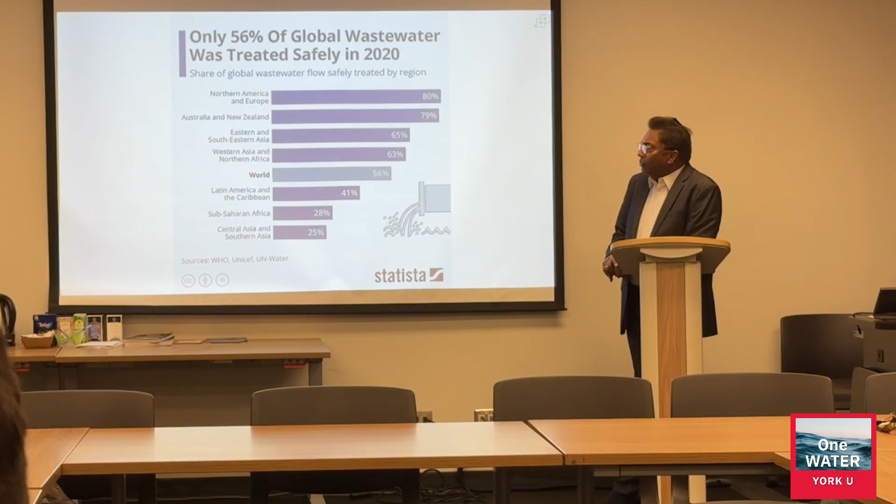So this is an updated figure from 2020. It shows the amount of wastewater which is discharged to the environment after a reasonable treatment. A reasonable treatment does not mean that it removes phosphates down to 0.5 or 0.3 milligrams per liter, nitrates down to 6 or 8 milligrams per liter, or COD below 100. It's far from that, but it is a fairly acceptable level.

And you can see that 44% of wastewater in the world is discharged to our water sources, water courses. A part, of course, goes to the sea, the other part goes to our freshwater resources. So it means that the little amount we have is also becoming inaccessible because of this unsustainable use of our water.

Then in the last few years we started to talk about the reuse of water. I understand that Professor Bra's team is also working on water resource reuse, because until maybe two or three decades ago, wastewater treatment was considered a cost only, a headache. Nobody wanted to work on this because it was just a cost, right? But things are now changing.

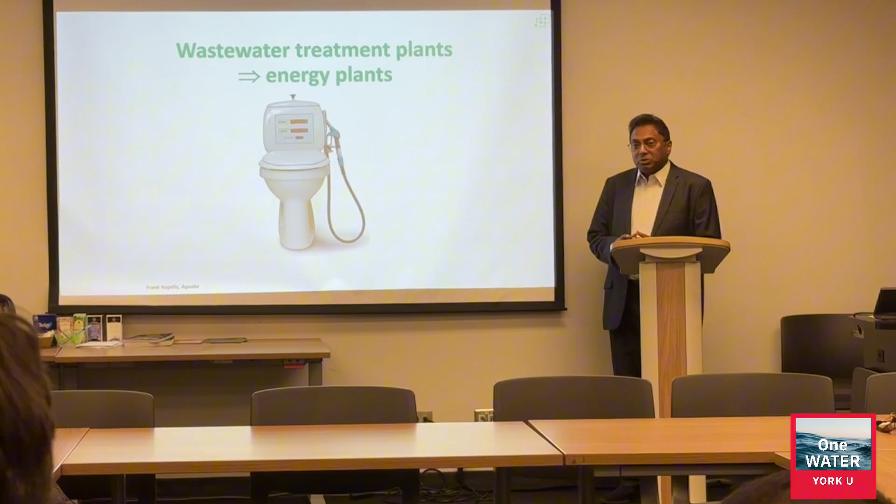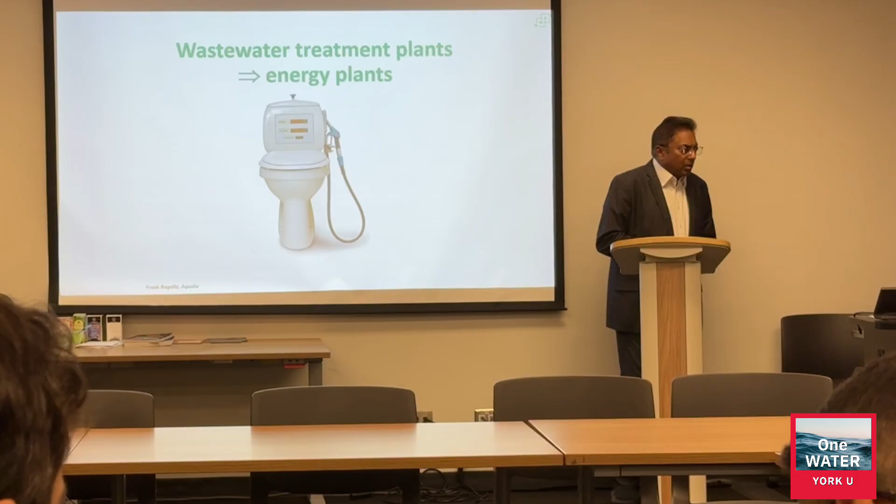One of my colleagues, Frank Rogalla from Aqualia, showed this figure maybe 20-25 years ago. He said, we will not talk about wastewater treatment plants in the future, we'll talk about energy factories. And in fact, that's what's happening. Although there are few, there are a number of wastewater treatment plants in the world which produce an excess of energy. They are self-sufficient with energy, and not only that, they also supply energy to the national grid. I think we are going to see more and more of this in the coming times.

If you take Germany, Germany has prohibited all sludge treatment methods other than incineration, because of space issues and other disposal issues. But it says that before incineration, you have to recover phosphates. And I think the most common way to manage wastewater sludge is now to generate biogas, but it's still not happening everywhere.

In Norway, we have been using our sludge on agricultural lands because the heavy metal content is extremely low in Norwegian wastewater, because we have been disciplined not to throw everything into our wastewater systems. Right? So Norway is one of the few countries which legally allows wastewater sludge to be used on agricultural lands. Up to 8% of our sludge was used on agricultural lands, but it's now reducing because we are also starting to generate bioenergy or biogas from wastewater.

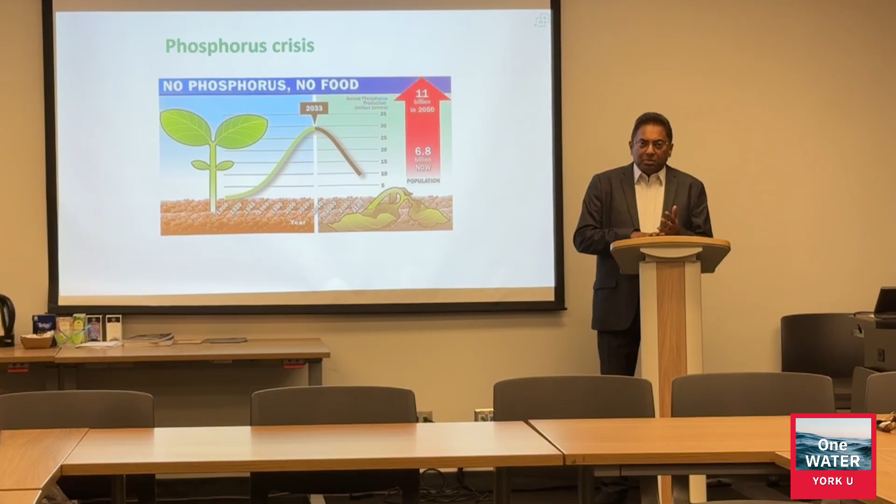But there are old concepts with new applications, like generating struvite from wastewater and wastewater sludge. Struvite is ammonium magnesium phosphate, right? These white crystal-like things. In wastewater we have enough ammonium and enough phosphates, but we don't have magnesium or potassium, so sometimes we add that, and then we can get the struvite out.

So to continue with the issues pressing our sustainability related to water, there are these factors I would like to mention: urbanization, lack of land, virtual water, and climate change. You might wonder what that has to do with water.

And these are the continents where the water challenges in urban centers are already critical, which means that they are going to face a huge problem in the time to come.

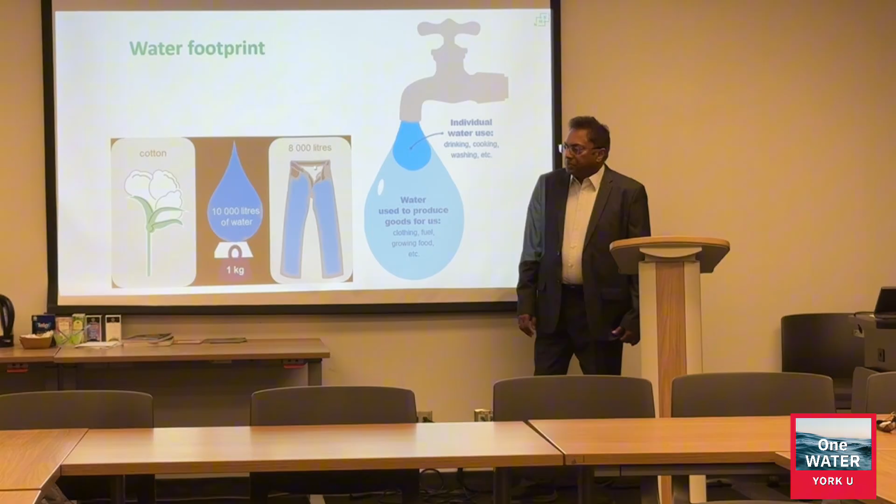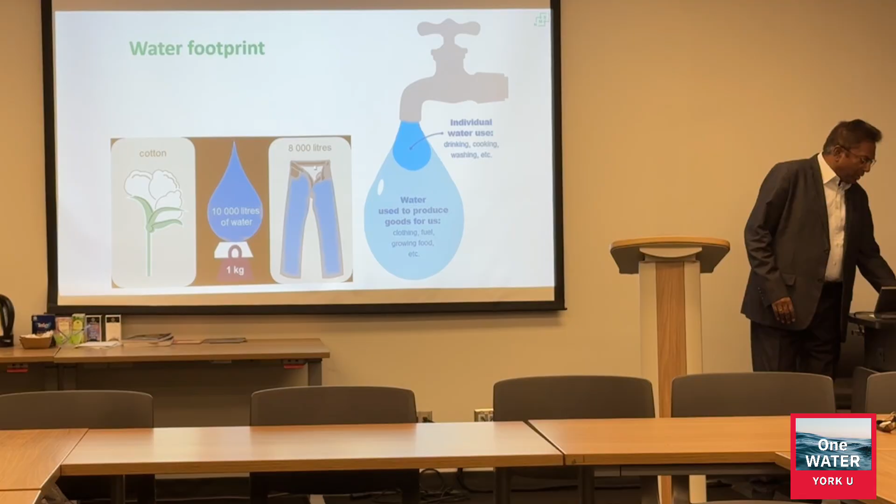What he says is that to produce one pair of jeans, you need 8,000 liters of water. Well, you can also live with that because you don't buy jeans every month, right? But if you look at this table, this is where you're going to get the shock of your life if you haven't seen this, right?

To produce 1 kilo of beef, you use 15 tons of water, starting from the grass and also the processing and everything, right? So that's why I'm saying that we have to change our traditions. Some of you are way ahead of us, like Professor Brad. No meat. But we have to change this tradition of using beef and pork.

Some of us are used to having steaks and beef, and that's why some countries have already found ways to produce artificial beef. I've seen Israelis have produced some steak, and Netanyahu, or one of the presidents before, when he visited this lab, tasted it and couldn't find any difference. That's completely vegetable based. It's much better than the veggie burgers we see here today. So this is an example.

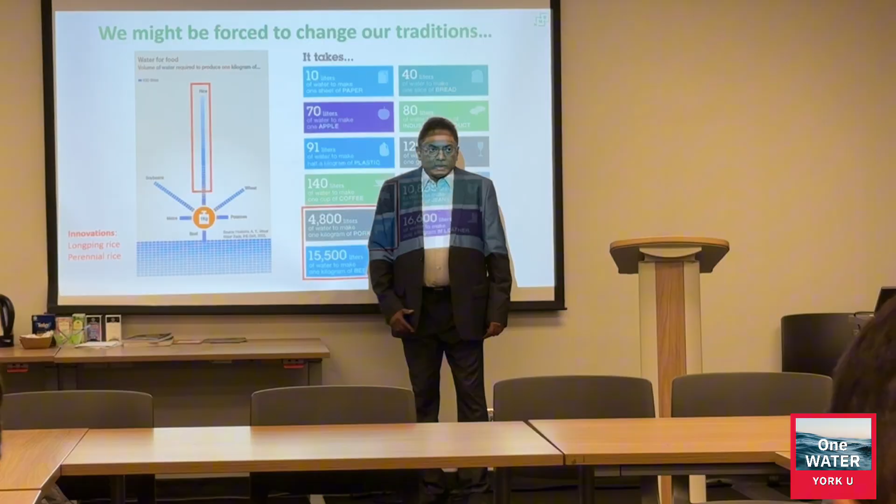But there are innovations, like this Chinese professor who found this Longping rice. Usually per year, 2 harvests are common, right? 1 to 2 and maybe 3. But this guy has come up with a solution where you can have up to 6 or 7 harvests per year. So it changes the whole thing.

And then there's another group of researchers working on what's called perennial rice, which means that after harvesting, you are not taking out the whole rice plants. You can re-harvest 2 or 3 times. So there are ways to do it, and we are working on that.

So this is a figure that we have to think about; even an apple takes 70 liters, 1 glass of wine 120, coffee is 140. So these are crazy numbers. Of course we can say that beef is coming from Brazil, Argentina, so it's their problem. Or 80% of your clothes were coming from China before Trump's time, but it might go down now because of the taxes, and so it's a Chinese problem, you can say.

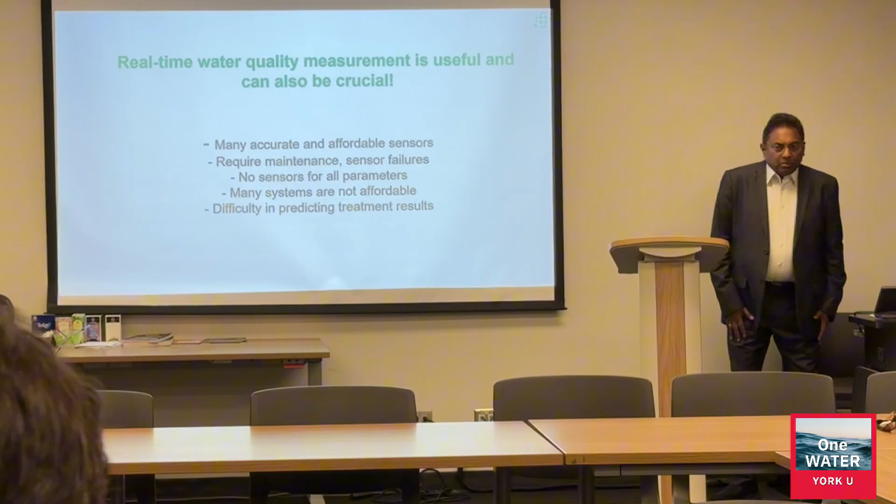So if you're going to measure phosphates, you take a sample and you add chemical 1, mix it, chemical 2, mix it, chemical 3, mix it, and let it stay for some time. For COD you will also have to heat it, and after that you measure the absorbance, right? So everything's automated. So these instruments are quite handy for laboratories which measure these parameters in bulk. They are using this because it saves time, especially in this part of the world where the labor cost is very high.

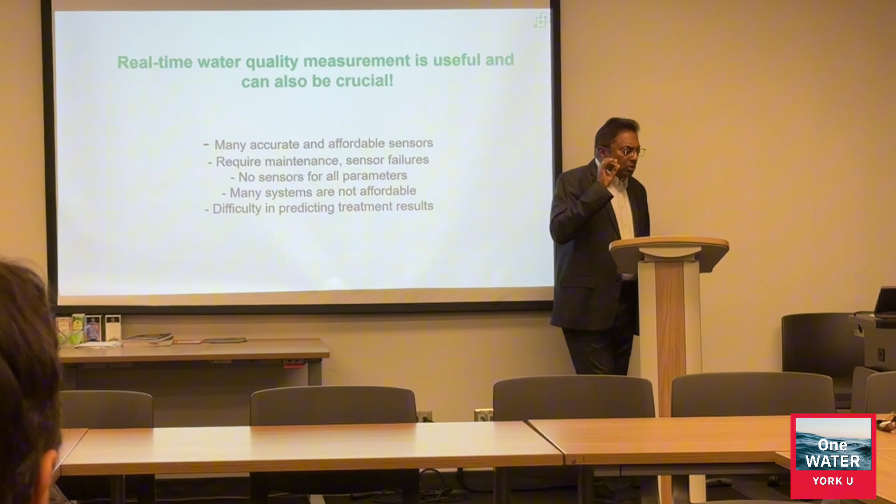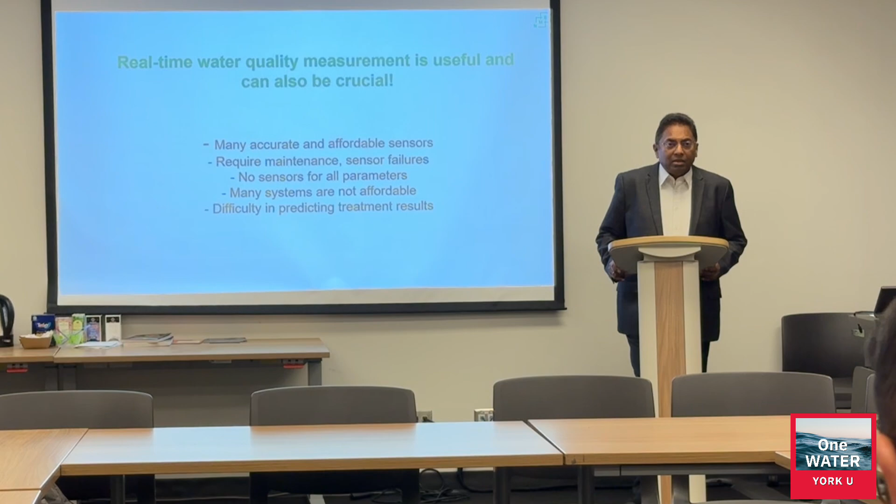And then there is a need for real-time measurement. We cannot wait 1 hour, 2 hours, 1 day, or several days until we get the results from a laboratory to optimize our treatment plants. Because if you think about wastewater, our wastewater quality is changing. We say that every 15 minutes our wastewater quality changes, but at least every hour it changes, right? So if you're going to get your results after a day, then the train is gone, so you cannot do anything with that. That's why we need to know the water quality, the inlet and especially the outlet, immediately, so that we can take corrective actions. So to do that, we have to measure the water quality in real time.

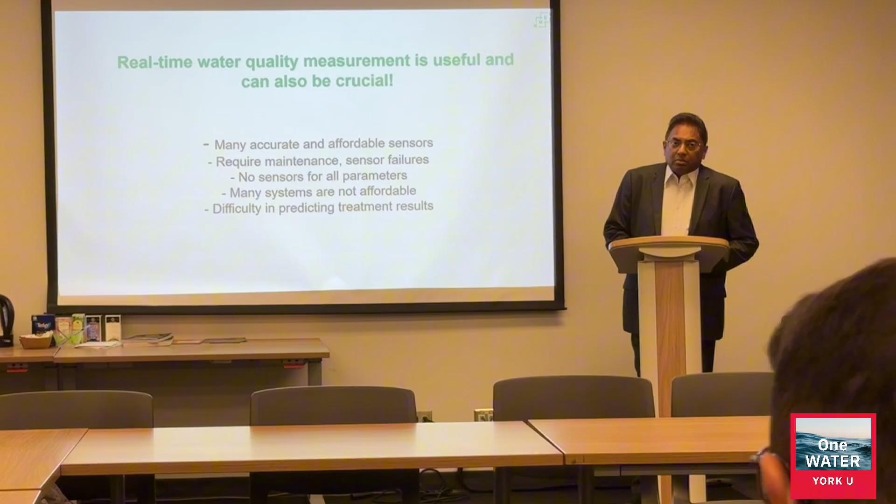To do that, there are a number of real-time sensors. There are many accurate and affordable sensors, but they require maintenance. So they will not work 24/7, 365 days. You have to maintain them. And even if you maintain them, they might not work all the time. So how are you going to deal with that if you're going to use them not only for measurements but also in your process control, right?

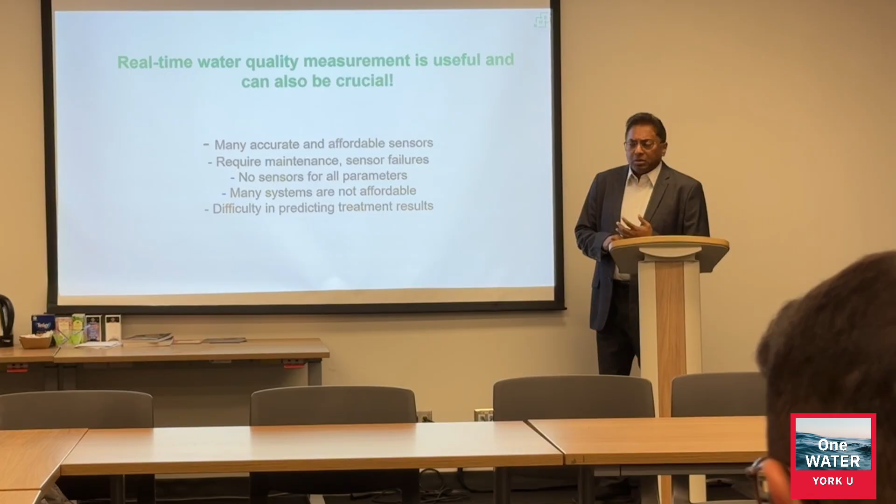And there are no sensors for all parameters. For example, for phosphates there are no real-time physical sensors. There are analyzers which give you the results after 10 or 15 minutes, but they are quite expensive. And if you take the emerging contaminants, there are no such sensors or real-time systems. The biggest problem is many systems are not affordable. They are quite expensive, and it is difficult to predict the treatment results. This is the other thing. We cannot say what's going to happen if we add this chemical or if we have the biological process. What would be the final result? We can of course say the average results of what's going to happen.

So this is a schematic figure for a drinking water treatment plant, conventional water treatment and a wastewater treatment. Right? Drinking water, we have a strainer, and then we have a coagulation stage, two-media filter, granular activated carbon to remove odor and taste and whatever, and then we have the disinfection part going on, adjusting the pH.

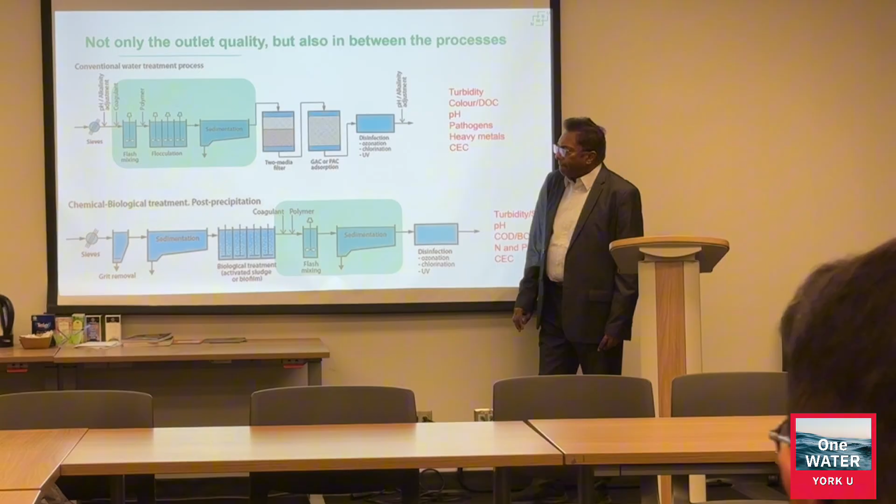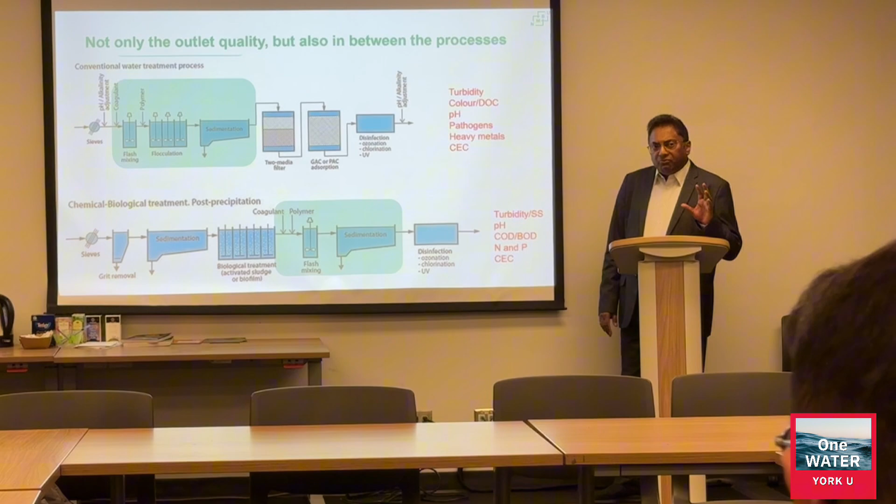In wastewater, there are different configurations, so it shows that we have biological pre-treatment or biological treatment to remove organics, and then we have the coagulation to remove the remaining particles and phosphates. Going out here. Before, it was enough to measure the water quality at the outlet and say, yeah, we are doing our job, it's good enough. But the times have now changed.

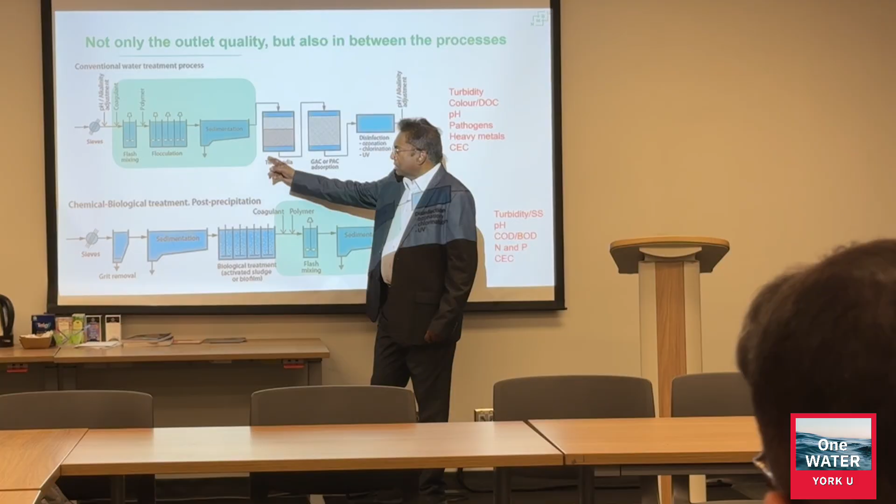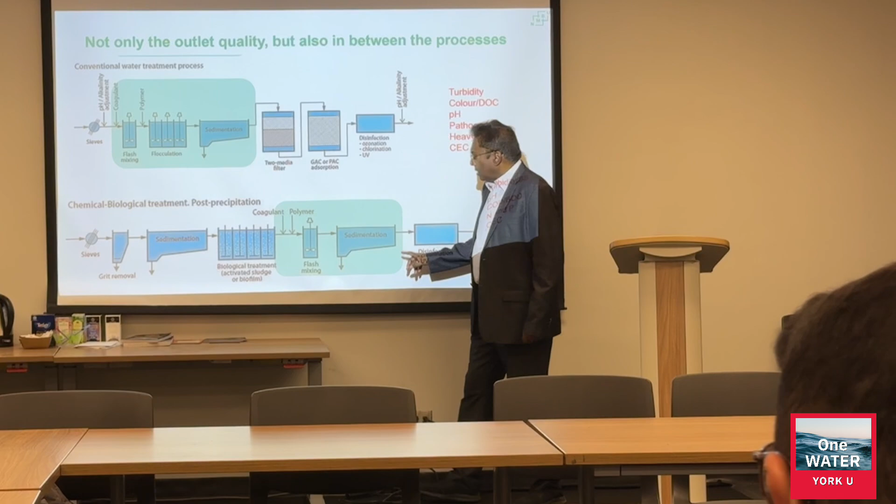We need to measure these parameters also at the inlet and in between the processes. So if we want to optimize this part independently of this part, we need to know the incoming water quality here, outlet here, so that we can optimize this process.

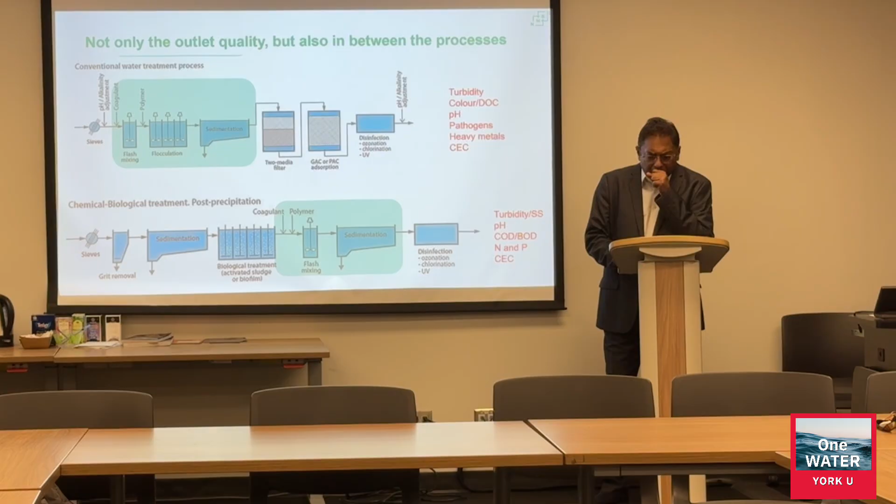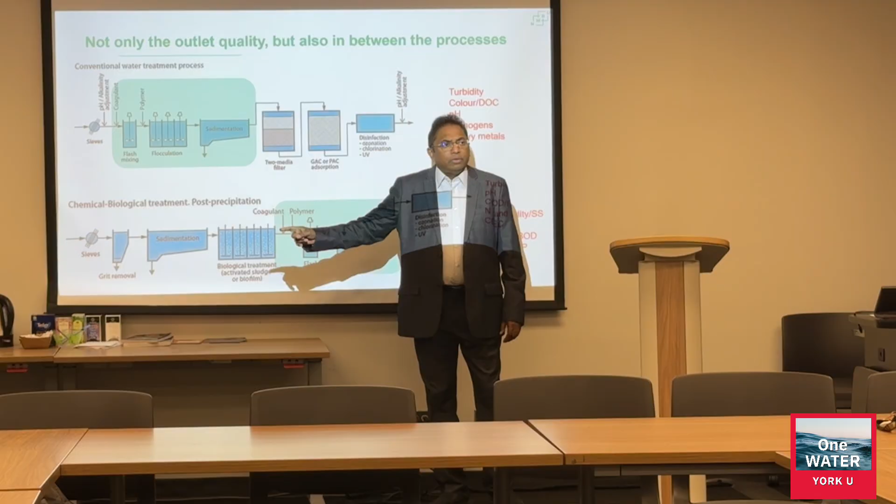When we talk about the removal of emerging contaminants, today we measure the emerging contaminants concentration at the inlet and outlet, and then we start proposing, yeah, let's add this unit process or this unit process. But I try to convince that, okay, we may need to do this, but if we run our processes more optimally, we can remove much more than what we are removing today. But to do that, you need to know the water quality between the systems.

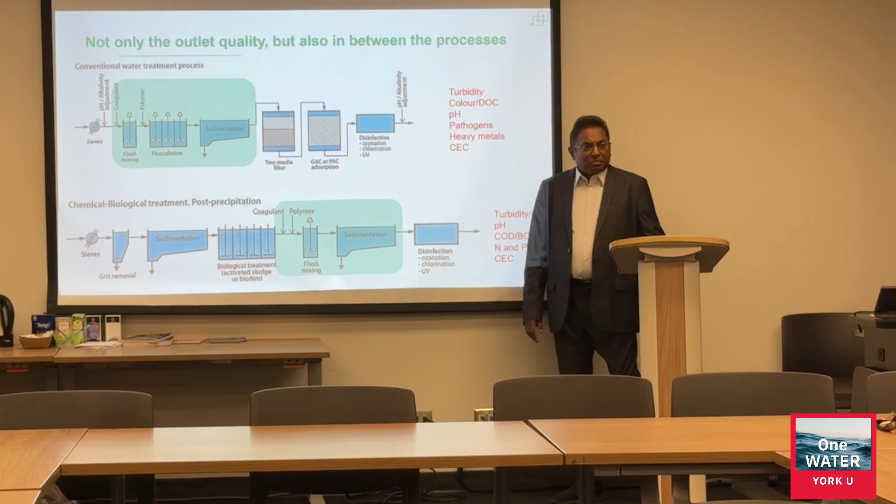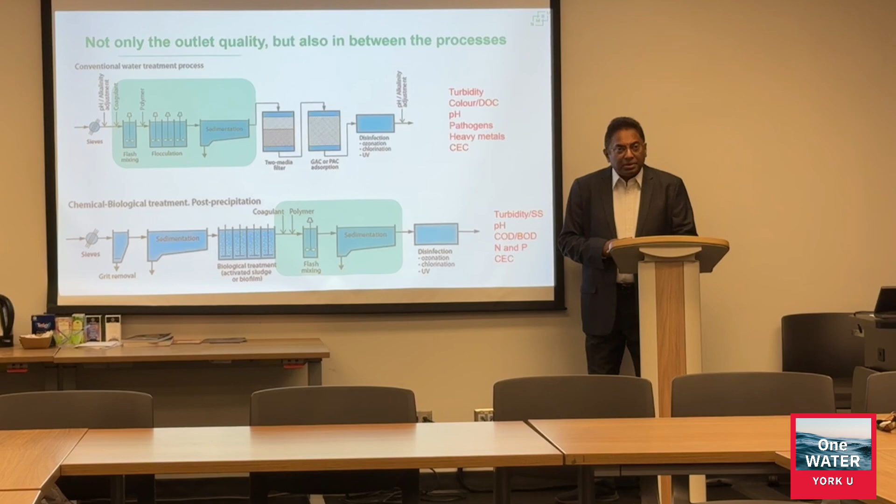So if you can measure the concentrations here and there, then you can see how we can optimize our processes or super optimize our processes, so the removal of this stuff will be much higher, and the additional process that we have to add here or here or here will be less in volume and maybe also less in costs.

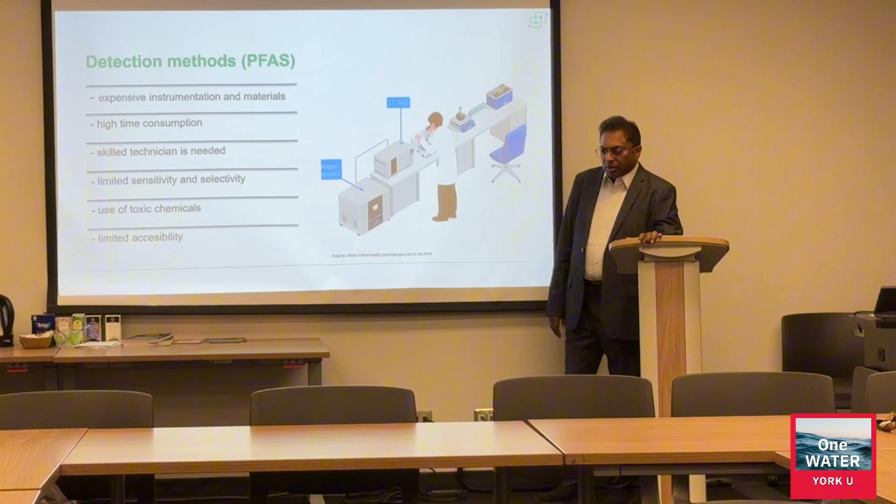So detection methods, if you take the high-end methods like for PFAS or pharmaceuticals, they're expensive, high time consumption, skilled technicians are needed, limited sensitivity and selectivity, especially if you're working with emerging contaminants, and you know that we are talking about nanograms, use of toxic chemicals sometimes, and limited accessibility. So we have to find a way to go away from them. So there are examples.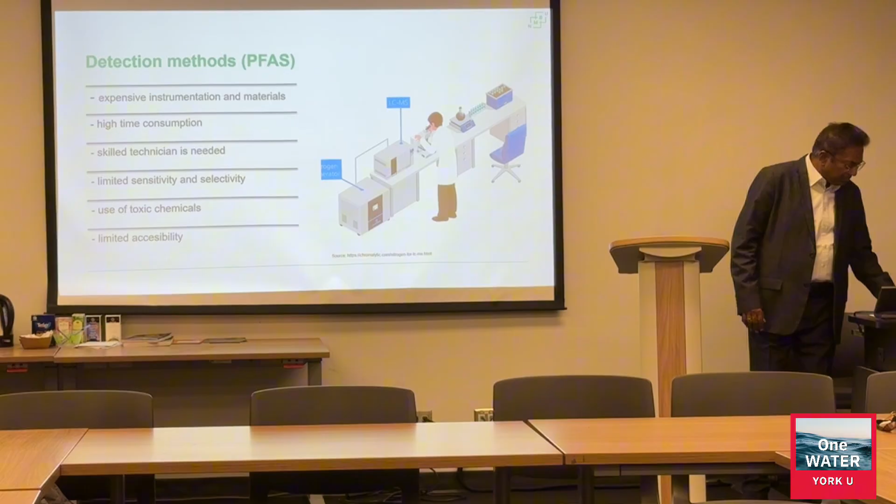Has anyone come across this sensor, this company called s::can? In your laboratory, the spectrophotometers, I guess all of them are scanning spectrophotometers, right? So you put a sample and it gives you the spectrum from 220 until 800, right?

When Professor Brad and I were at the university, we had to measure the absorbance at 450 and got the result. And sometimes that spectrophotometer measured only at that wavelength. Sometimes we could turn it and measure maybe 3 or 4. But now we're in a different world, where we get the whole thing. So this company, this is an Austrian company, they are probably the first in the world who produced the sonde which produces the scanning spectra.

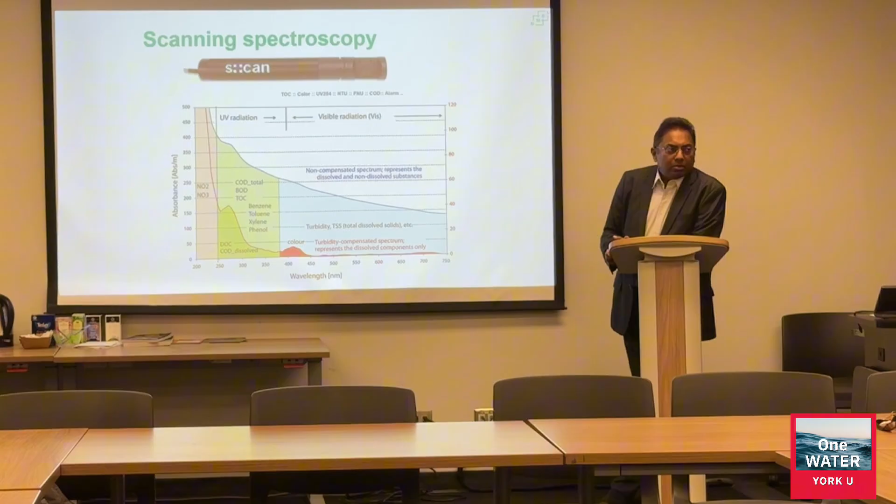Right. So here's the results. So they start from around low 200 and go up to 800. So in a sample, they will get this spectral absorption curve, right? And this absorption curve is influenced by the particles in water. Since you can measure particles like turbidity with the same instrument, you can subtract that, and then you can have the net absorption curve, which is shown in red here.

And then you can have algorithms to convert the absorbance at, for example, here 420 into the color in milligrams per liter, right? The same way like COD, BOD somewhere here, nitrates and nitrites are here, and some other parameters. So you do the scanning or analysis at once within seconds, and on the screen you will see all the parameters

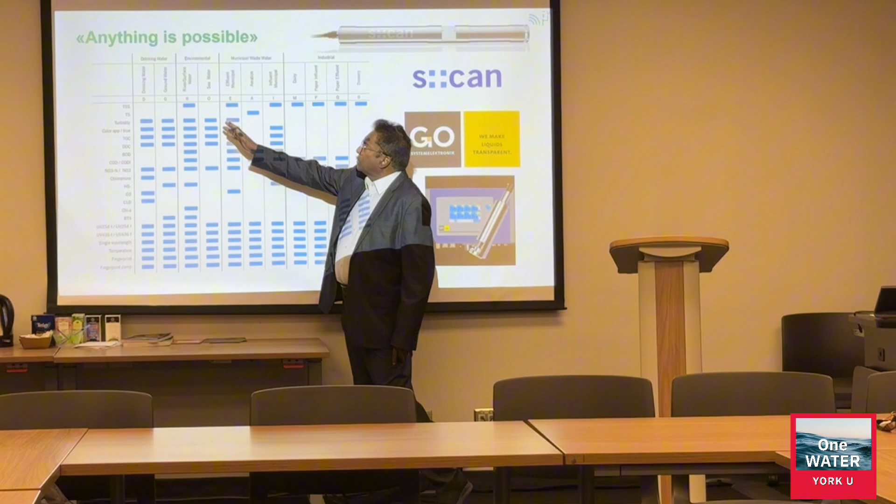measured. So soon after this Austrian company s::can, there was a German company called go Systemelektronik that started doing the same thing. What they say is that they can measure anything, but not phosphates. Apart from phosphates, they put everything else. So those are drinking water, groundwater, river water, sea water, and wastewater, paper mill, industry, everything. And the blue sign means that this sensor can give you all the measurements.

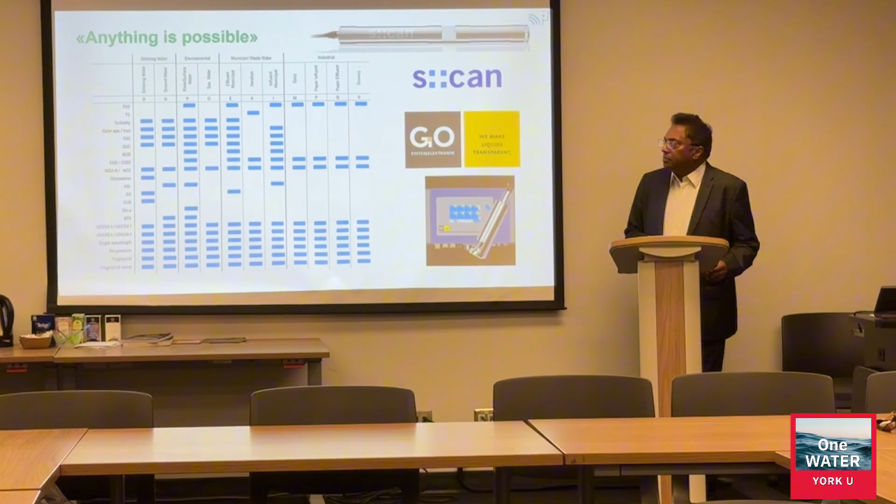So there are some versions of this instrument. So it's like a wonderful instrument. It is, but there are divided opinions or experience from the users. Some are very happy. Some say that it's not as what they say. Some countries have bought these instruments. They put, I think, 100 or 1,000 units along Ganges.

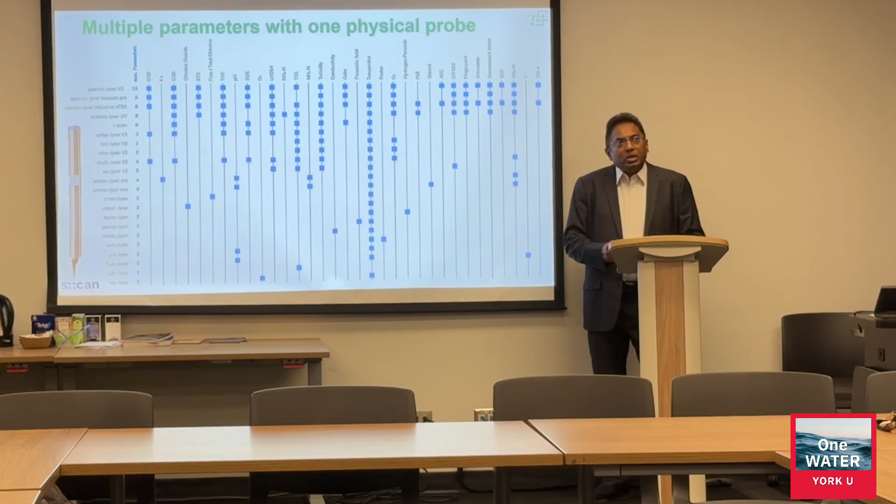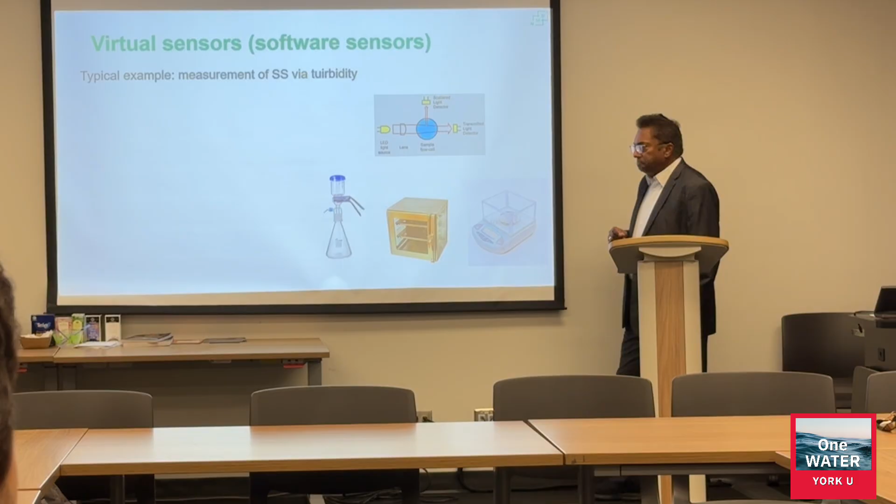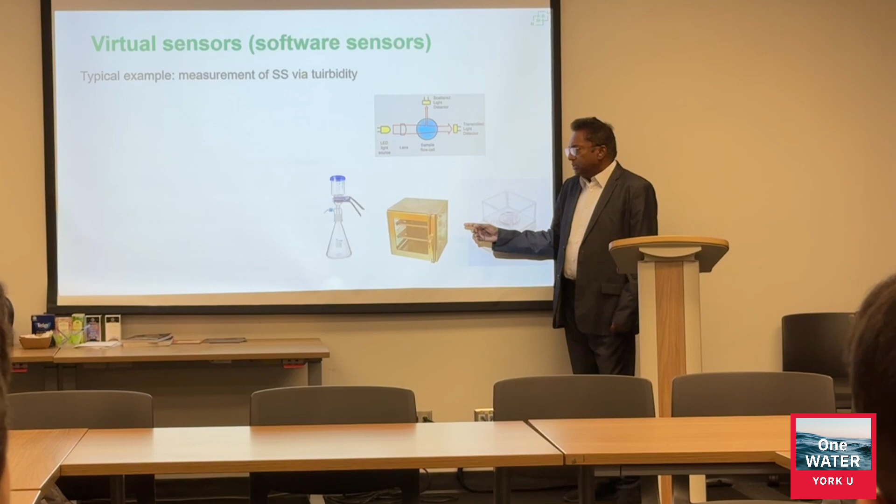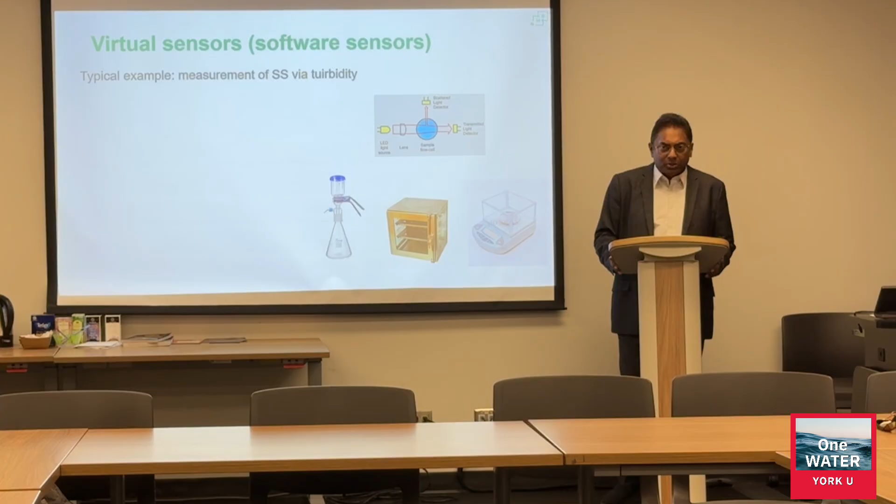The explanation is like turbidity measurements: you take a sample, put it in a turbidity meter, and you get the reading within 2-3 seconds, right? But if you want to measure the suspended solids, you have to weigh the filter, filter your material, dry the filter, and then weigh it, subtract, and you get the total suspended solids after 2 or 3 hours.

But at the same time, now there are sensors which can measure suspended solids momentarily. So the principle is quite simple. There is a linear relationship between the turbidity and suspended solids. Now they measure turbidity and they show the suspended solids because there is a linear relationship, right? So you can even use Excel to develop this relationship.

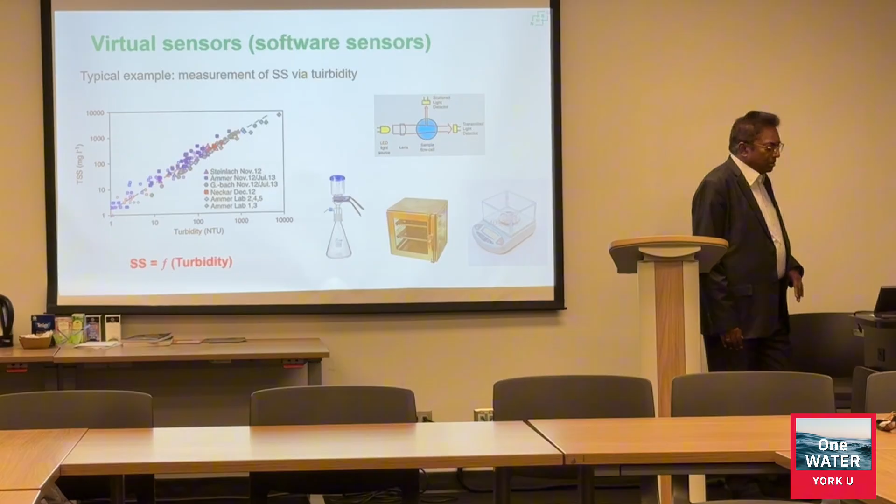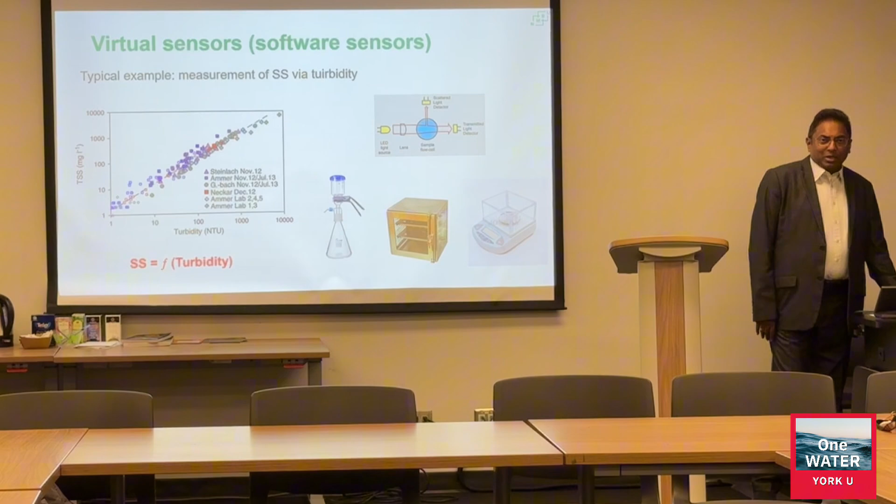And then there are many suppliers of these suspended solids sensors, and the leading Western producers would charge maybe 10,000 Canadian dollars per sensor, while there are now Chinese sensors in the range of 5,000 to 20,000. 10,000 Canadian dollars is the price of European or American brands, but you can get it for like 10% of the price from the Chinese brands.

But it's not about suspended solids. Suspended solids anyone can measure, right? So we wanted to measure what is required, like COD, phosphates, and nitrogen. And here you cannot do it with Excel or simple ways. So what we are doing is that we install a few of these cheap and simple sensors like flow, pH, conductivity, and turbidity. They measure continuously in a treatment plant. And then we combine those measurements with historical data, and we have algorithms to estimate COD, phosphates, and nitrogen species. And we can do it for many more.

So it's working perfectly fine. Here you can see correlations of more than 96% for phosphates, and for COD around 88%, but these figures are from 3 or 4 years back from our publications. But now our prediction accuracy is over 95% for phosphates, and COD, BOD and nitrogens between 90 to 93%. So we started this with statistical methods, but now we are using machine learning, and AI can make it even more accurate.

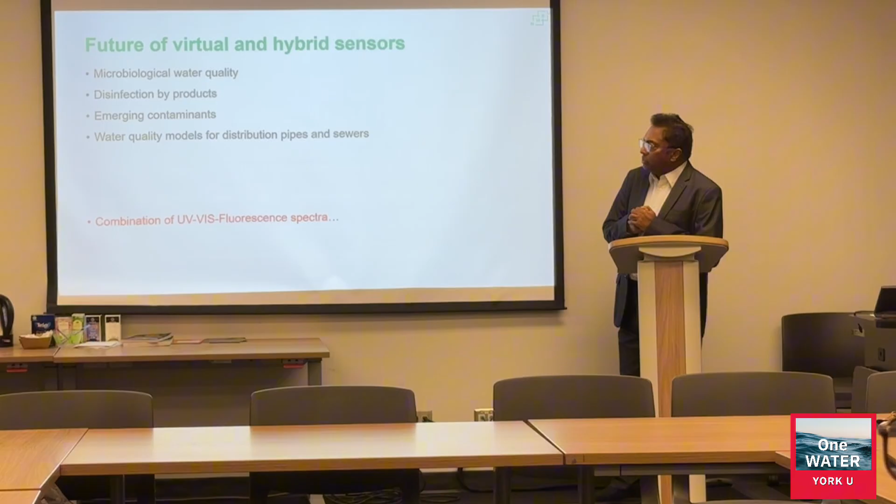So I believe that future virtual sensors will give us solutions to measure microbiological water quality. This is one of the biggest challenges that we have today. Still, there are no accurate methods to measure the microbiological quality in our drinking water plants within hours. The traditional methods take 24 hours. There are simpler methods which can give you some idea within 6 to 12 hours.

But if you want to wait until all the analyses are in place, you have to keep that water without releasing it to the public. No city has that capacity. You're talking about hundreds of thousands of cubic meters, right? So what every treatment plant does is we do our best to remove all the pathogens and also do disinfection, and we discharge it.

And then we also do control measurements in the lab, but before we get the results from the lab, we will get a call from a doctor saying, "Hey, look, now there are 15 patients with diarrhea." So doctors find it before we get the report. So we have to change this. How are we going to do this? I'll show you some examples.

So we have disinfection byproducts. With disinfection byproducts, we know chlorine is the most common method to disinfect. And in order to be sure, we add more chlorine.

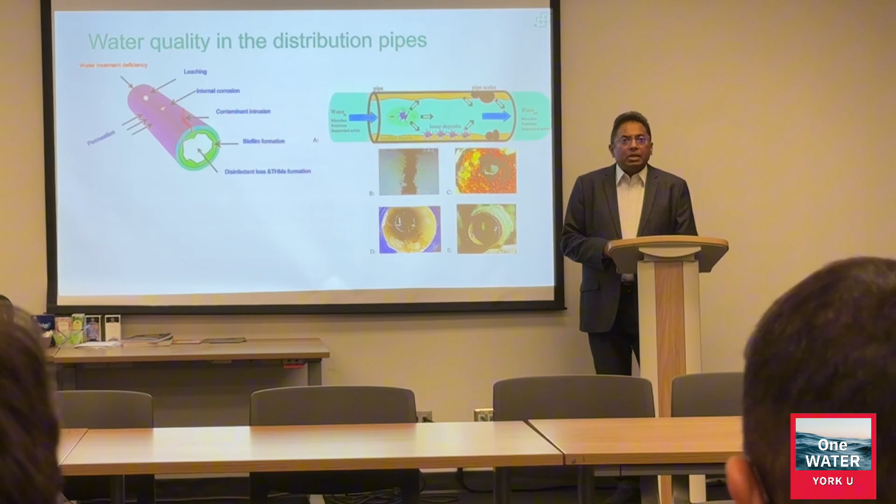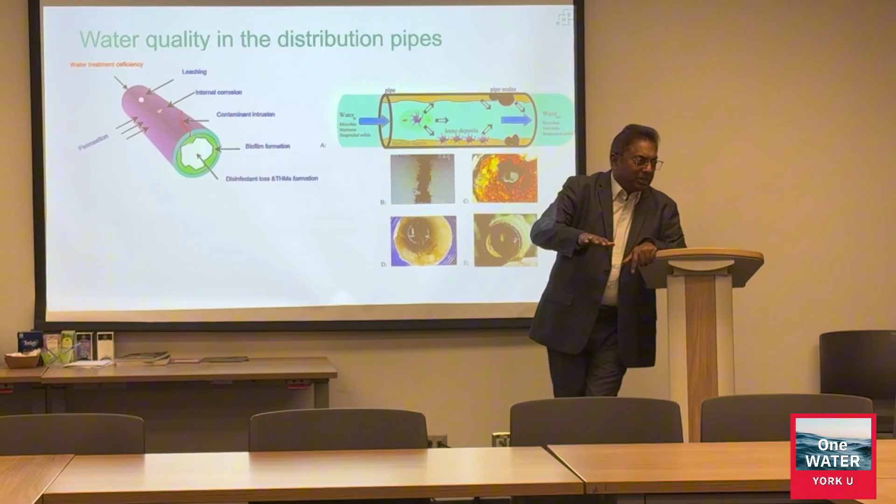And then water quality: how to measure the water quality in pipes and sewers, like this one. Drinking water pipes and wastewater pipes. Historically, we put the wastewater pipe at the bottom, then the rainwater pipe, and then the drinking water pipe. So even if the wastewater pipe is leaking, the wastewater is at the bottom layer, right? And then we have rainwater. So drinking water pipes are higher in level, so less contamination problem.

But let's say that we avoid that problem and we start transporting our water from a treatment plant to consumers who live 10 or 50 kilometers away. While it is transporting, water can get polluted, from intrusion of wastewater, but also from something happening inside the pipes and the fluids.

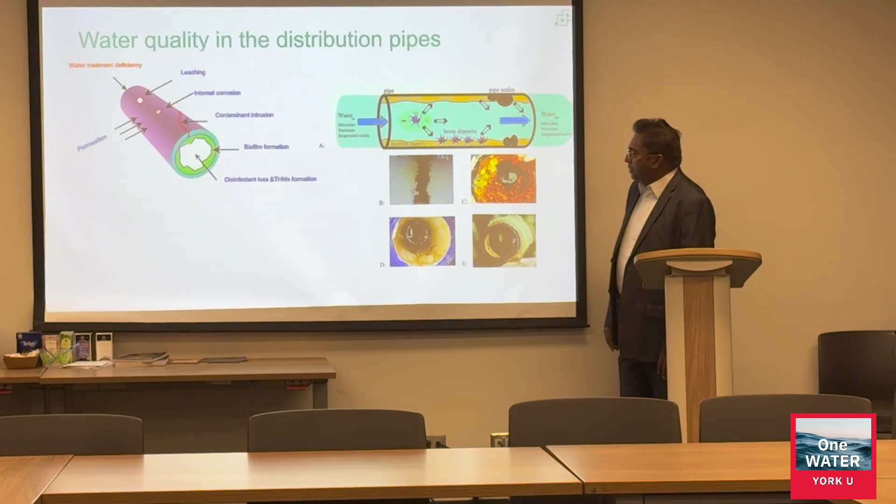If you happen to see inside of water distribution pipes, better not to see it. If you see someone digging up the drinking water pipes, don't look at it, or you get the shock of drinking water from these pipes. It's terrible. So you have all sorts of possible things in the pipes.

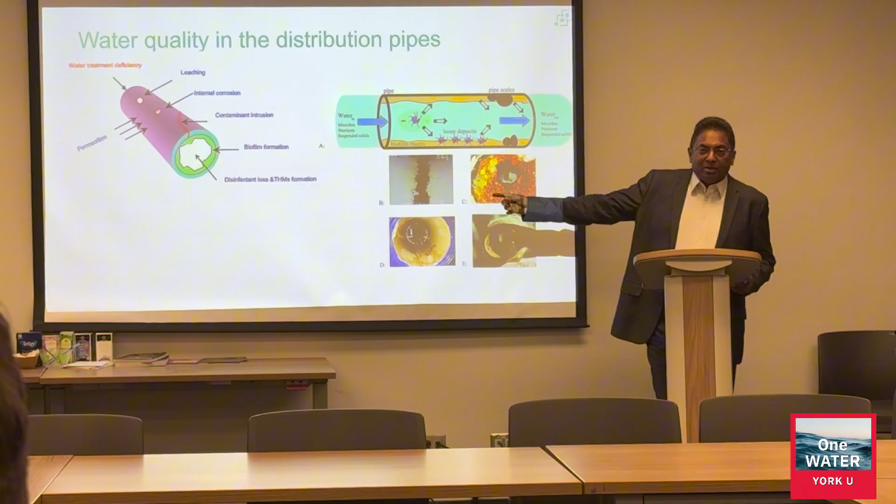But how are we going to measure the water quality? We cannot take samples every 10 kilometers, every day. It's not going to happen, it's so expensive. So we have to find sensors which can do this job, maintenance free and low cost. So here is another example where we can use real-time hybrid type sensors.

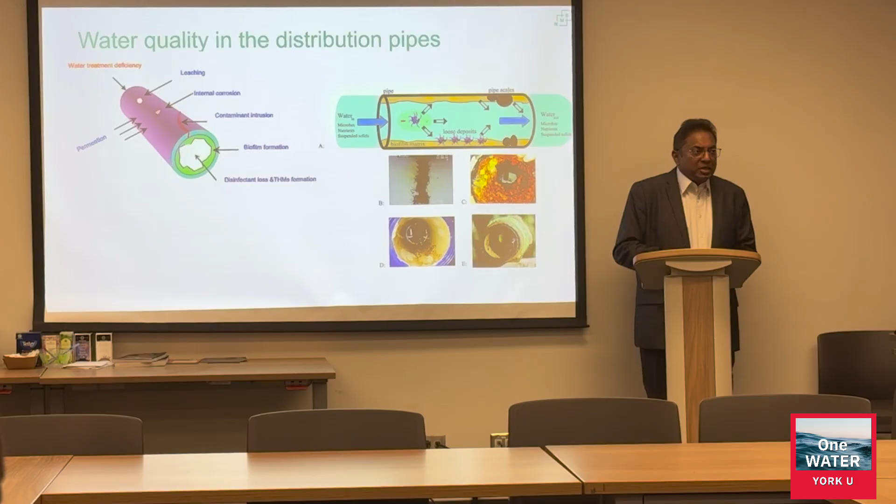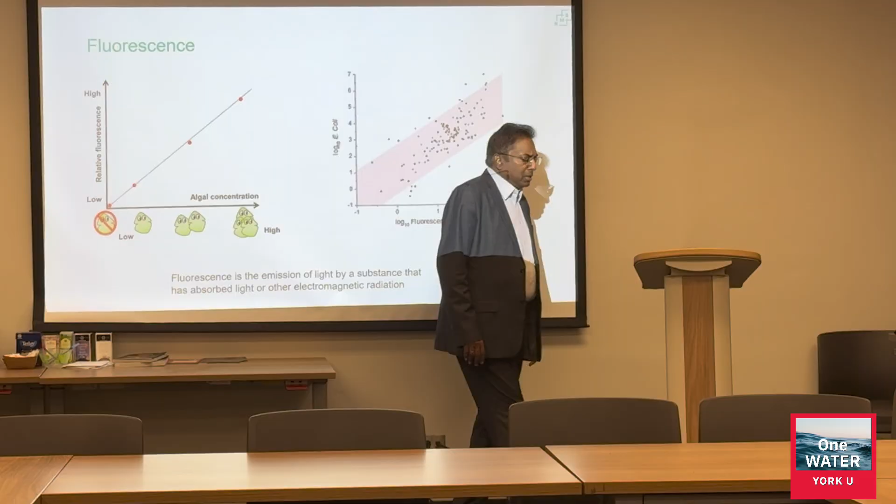When it comes to microbiological quality, there are sensors to measure the algae concentration in lakes and rivers. They use fluorescence. For example, in Norway we have offshore salmon farms. Our salmon farms need to know if there is an algae invasion coming a day or two before. If they know it, they can slaughter the fish and put them on the market, or relocate them.

Has anyone heard about the term called ferry box? Probably not. Some people in Europe know about it. Ferries are everywhere, right? I'm sure with the Great Lakes there are passenger ferries, right? How do you monitor the water quality in the Great Lakes? Take samples, probably, right? And you don't take them every day because of economic reasons, and this was the case also in Norway.

Norwegian water authorities have commissioned research institutes to go and analyze and provide reports. During the summer they have more frequent visits, maybe every week, and other times maybe once a month. But still they miss some of these algae blooms because we are not measuring every day. It's so expensive.

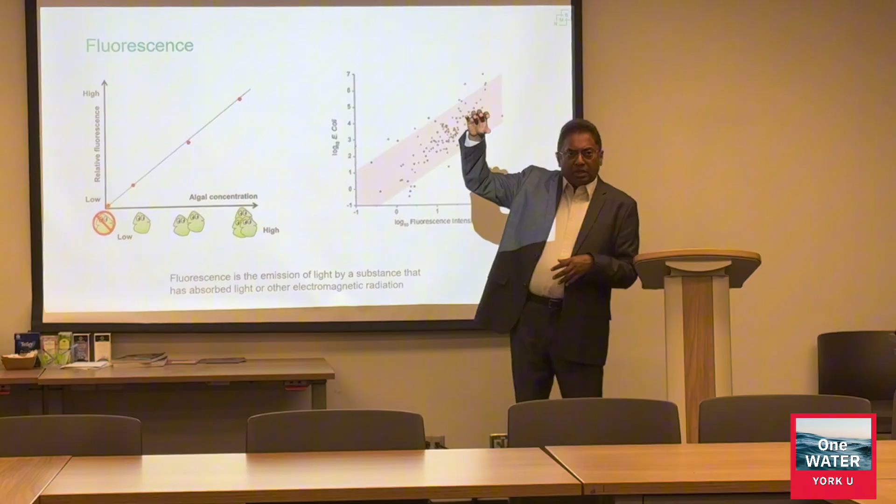And on the top of the ferry, there are infrared monitors measuring the particle concentration, sending it to one of the research institutions, and it gives a picture of the concentration. The beauty is that the ferry companies are happy to provide that because they feel they are part of a solution. So research institutions don't pay for this service. We have installed it, and as a result, we get water quality every 300 meters along the path.

And then we use, so then we get the water concentration or the water quality up and down this path, but our seas are so big. So what we do is that we get a satellite picture of this area, and then we calibrate the satellite picture using these real-time measurements, and we get the full picture of algae concentration and other particles in the sea, which is fairly accurate.

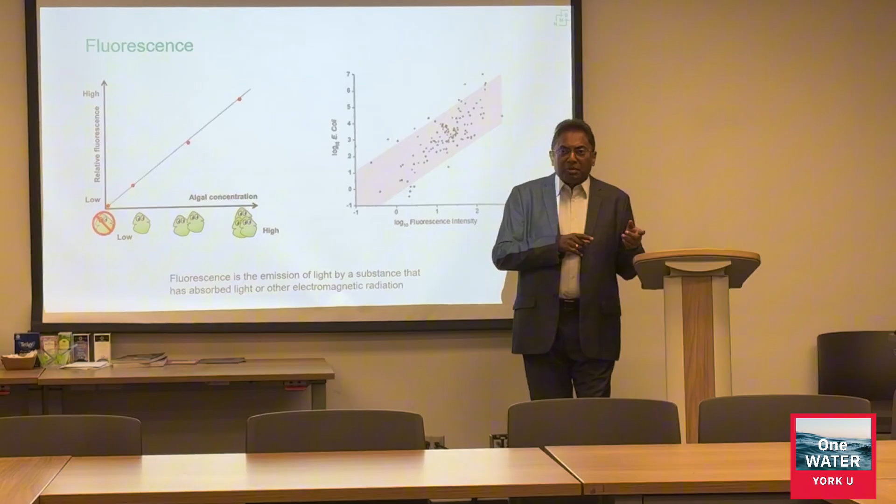And then if you see that algae is coming from, let's say it's coming from Denmark, and it's going to reach the Norwegian west coast in 48 hours, we will give signals to our salmon farms, and they know what to do.

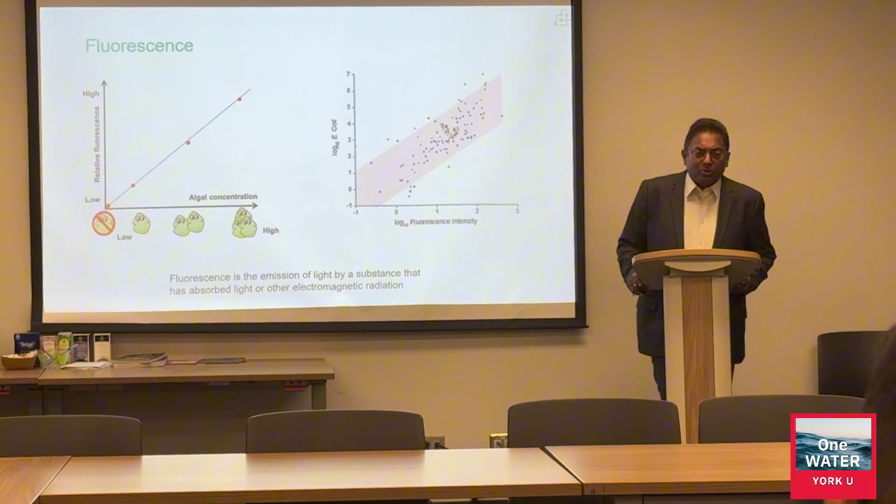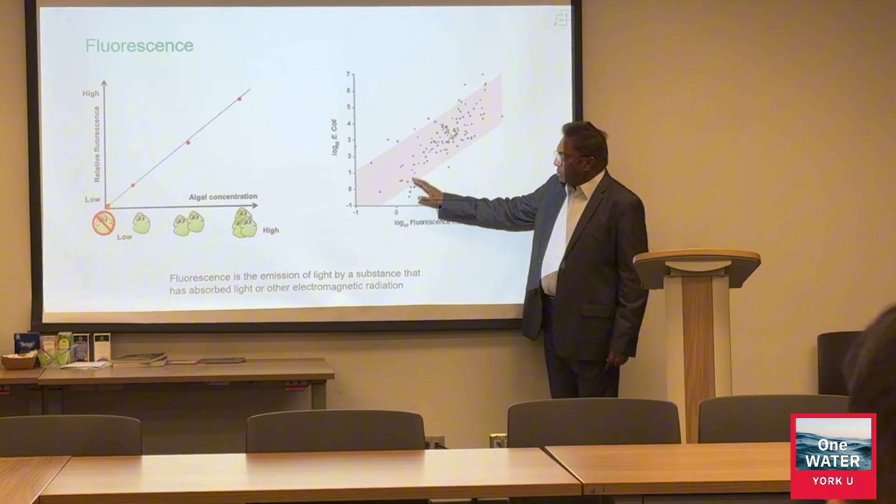So this is algae. Algae is much bigger than the microorganisms. So there are some research papers showing that even E. coli could be measured using fluorescence. It's not an exact science, but it shows that there is a trend, right? Fluorescence intensity can be calibrated against E. coli. So this is something that we want to follow up with. We are working on this.

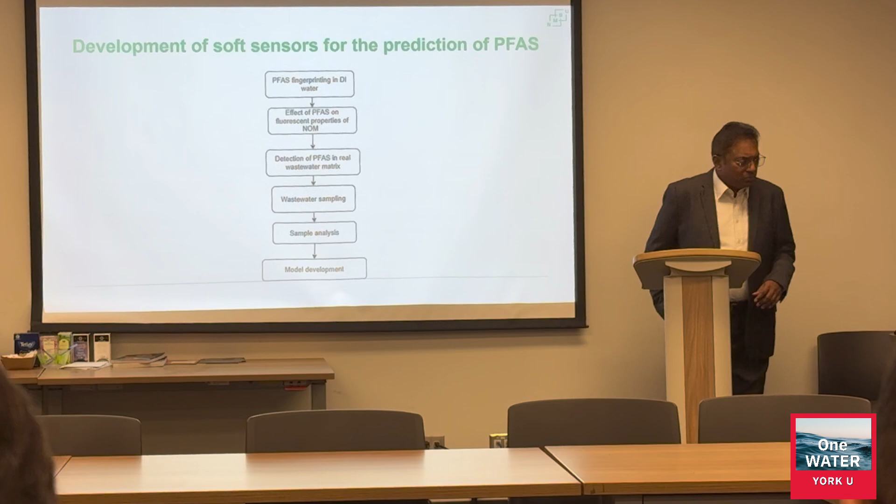Now the last part is I want to show you some interesting measurement practices of emerging contaminants, specifically PFAS. So we want to develop a soft sensor or a hybrid sensor for PFAS measurement in wastewater. So what we did was that we measured the fluorescence in water with PFAS concentrations.

There's a nice instrument. If you don't have it, you should think about this. There's only one producer in the world. It's a Japanese company called Horiba, and they have these two instruments. The lab instrument called Aqualog, and the mobile one is Veloci. It can measure the three spectra in one sample at once: UV, visible, and fluorescence. Because everything is measured in one sample, then you can also use the models to predict using this data.

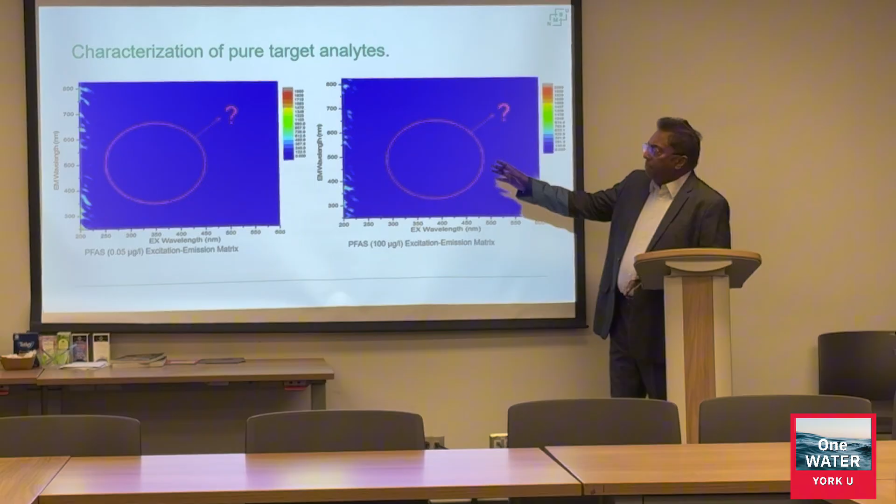So our idea was to use this, especially if we can get fluorescence data, then we thought, okay, if we see the emission and excitation, then we can correlate to the concentration. But unfortunately, PFAS is not emitting anything. So you can't measure PFAS using fluorescence. What we found was NOM, natural organic matter, can be measured using this method. It was also documented before we started our research. We could also confirm that we can correlate NOM concentrations to fluorescence.

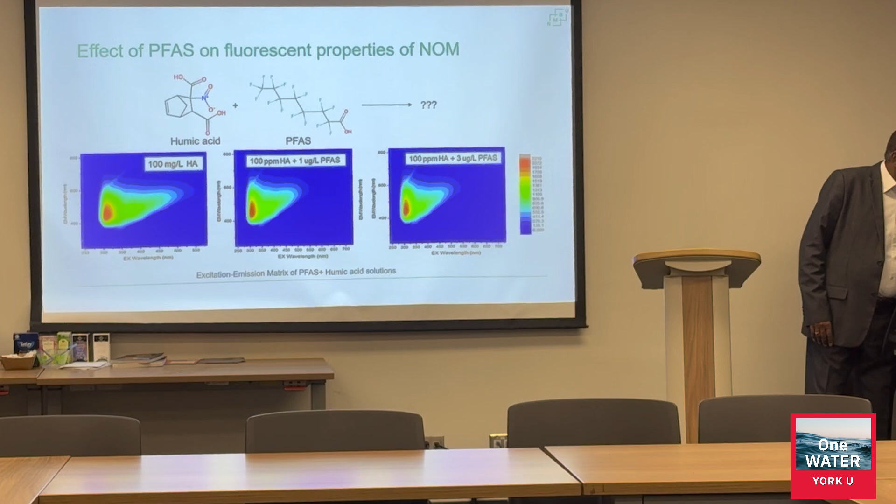But the surprising thing that happened was that when we had our wastewater with NOM, then we could correlate PFAS with EEM. So here's the pure samples, and these are synthetic samples where we had PFAS 1 to 3 micrograms per liter. You can see that when we increased the PFAS concentration, the excitation figures are changing.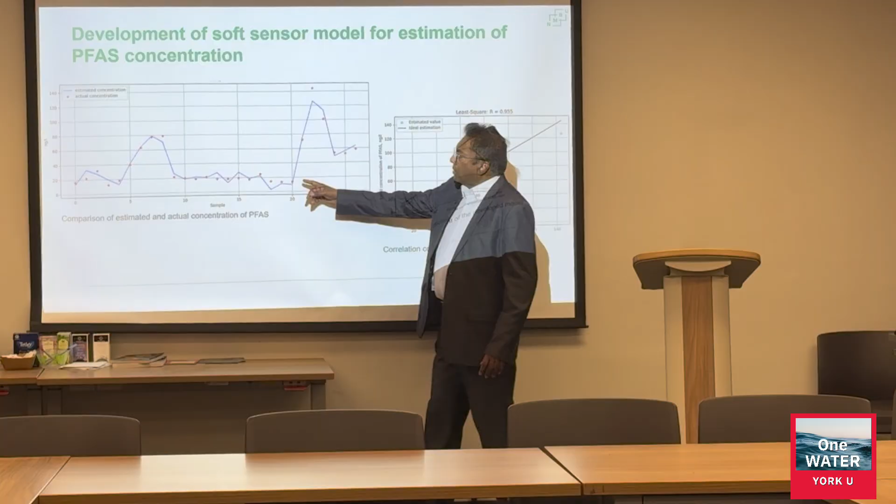So we did it for the wastewater, and the final result was that here you can see the red ones are the measured concentration of PFAS, and the blue ones are our estimation. So fairly fine. And this was the first set of results that we generated. So we are confident that we can go further.

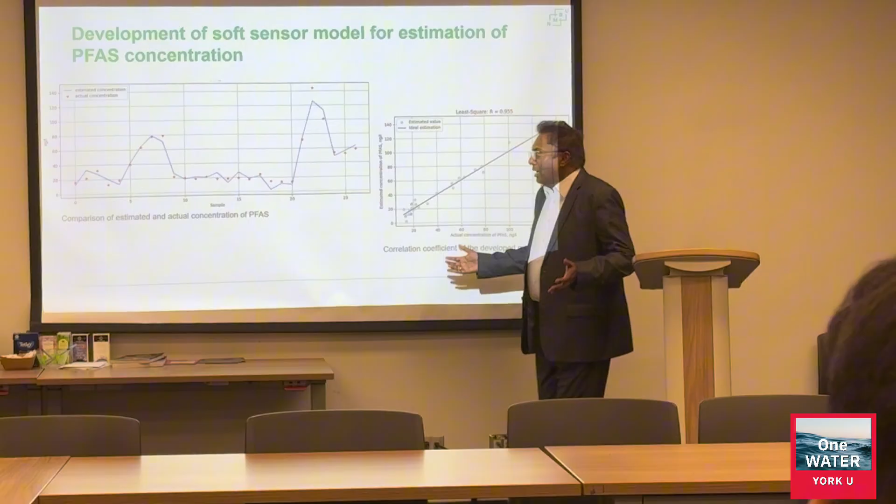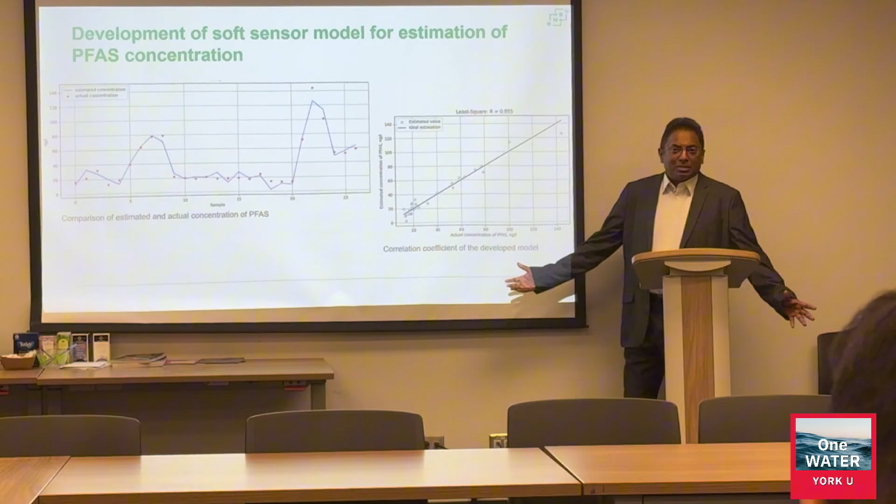But of course, even within my team, some researchers say, no, this cannot be true. This is NOM. This is not PFAS. I'm saying, look, guys, be open. I could correlate PFAS concentrations with our estimates. So there should be something. So we should not just discard this idea. Right? So now one of my students is starting a PhD on this, and here you can see the correlation is nice.

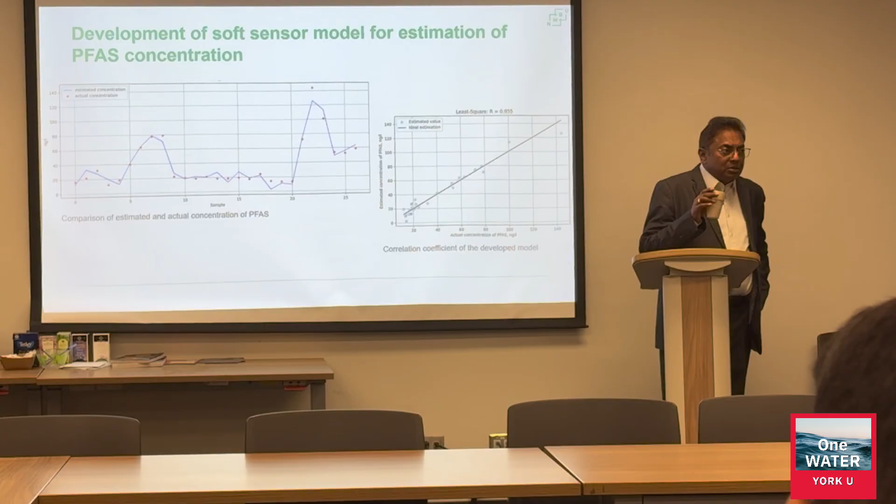So with respect to this sensor, did you also run NOM alone? Yes, because prior to this experiment, we were using fluorescence to estimate NOM concentrations. And then we knew that, okay, we can estimate NOM with fluorescence. And then, I don't know whether someone thought about this or it happened by accident, but suddenly we saw that there is a correlation.

Impossible to tell why. So what I meant is, with NOM, is the excitation below the NOM plus PFAS excitation in terms of? Yes, okay. In the literature, there are some hypotheses, not only hypotheses, some documentation saying that you can add something to increase the fluorescence in PFAS, but we never managed to get that one.

So one example is using chitosan with PFAS, right? This Chinese research group said that if you have chitosan, then you will get the fluorescent signal. But the problem is, we say chitosan, but chitosan can have different forms. We could not find a way to replicate it. My Chinese colleagues talked to the Chinese guy, but still we could not replicate it. So we are still struggling.

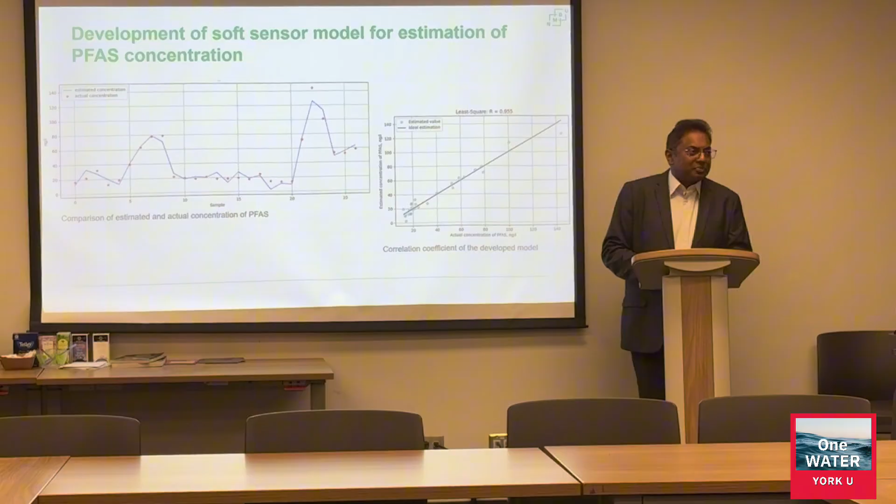So you use humic acid as the representation of NOM? Yes. But this was the first level of research. I think I need to do much more. This is not published yet, so it's still the first level.

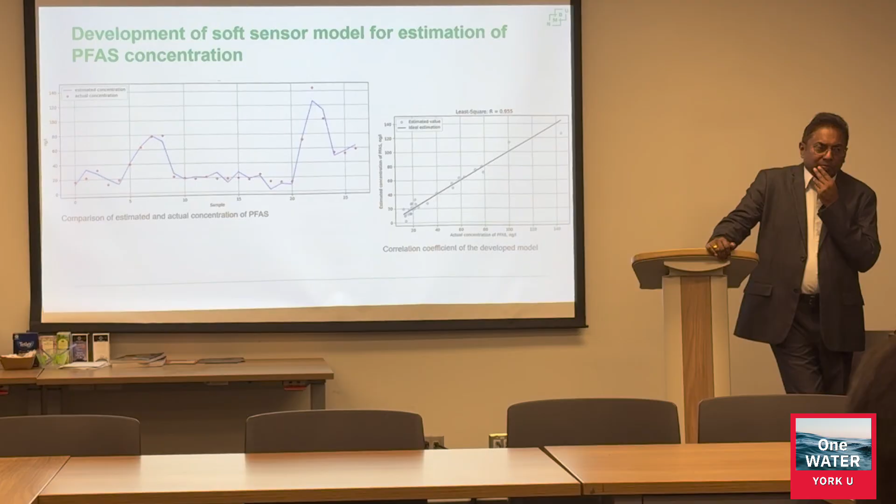And then a disappointing situation with the emerging contaminants measurements. From next year, we are going to have a law for wastewater treatment plants, I think 12 components, divided into 3 groups. It's the EU regulation. Each treatment plant must document that they remove more than 80% of 3 of the substances, or 6 of the substances. This is from EU, and I think it's not going to be enforced before 28.

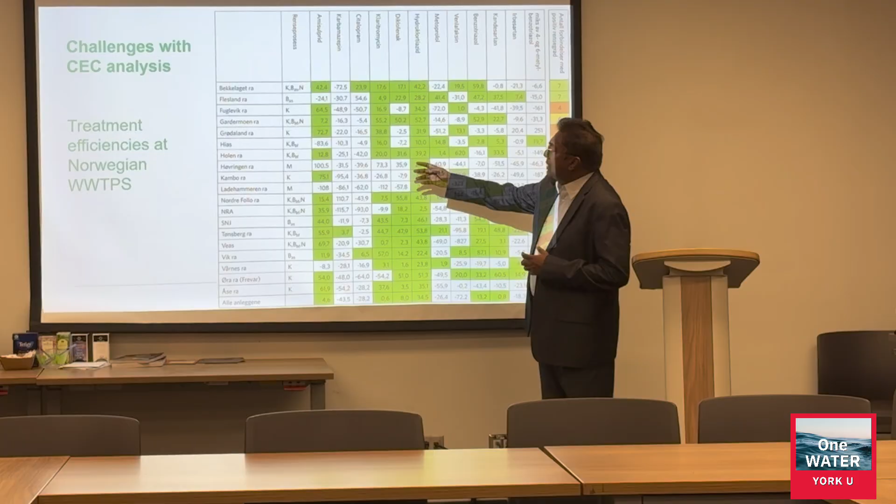The most plausible explanation is that during the wastewater treatment, some of these components change their structure. They release into, let's say the inlet concentration of carbamazepine is maybe 10 nanograms, but during the treatment process it increases to 20, and then in the outlet we measure 20, or maybe 15, but 15 is bigger than the inlet of 10. That's why it shows a negative removal.

Then you can question this EU regulation saying that you have to remove more than 80% of your CEC components. You can't do that because the form is changing in the treatment plant. Somewhere, sometime, no one knows, but we know that it's happening. So you cannot talk about removal of 80%, but you can talk about absolute removal, saying that it should be less than so many nanograms per liter. So that puts a big question: what are we measuring in our treatment plants?

And then the high-end researchers who are working with this analysis every day say that PFAS and some of these components can stick to the glass walls or plastic walls, or the sampling is a big thing, and at the end I have to conclude that I don't know what I'm measuring.

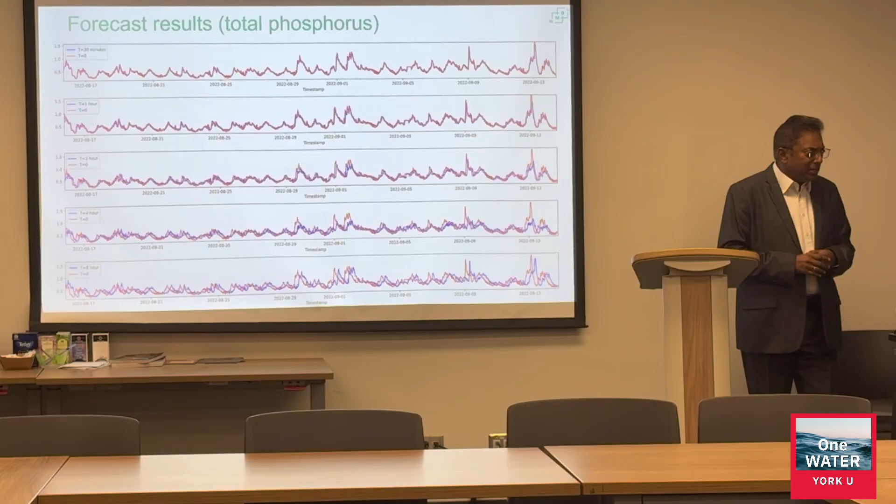studies. So this shows that we can actually start to find a way to predict our outlet concentrations, which means that if we can do that, we can also quickly adjust our process parameters so that we can maximize the yield. There are many things coming up with AI and machine learning which you could not believe before. I'm sorry if I created more questions than answers, but this is what we have to do. Thank you very much.

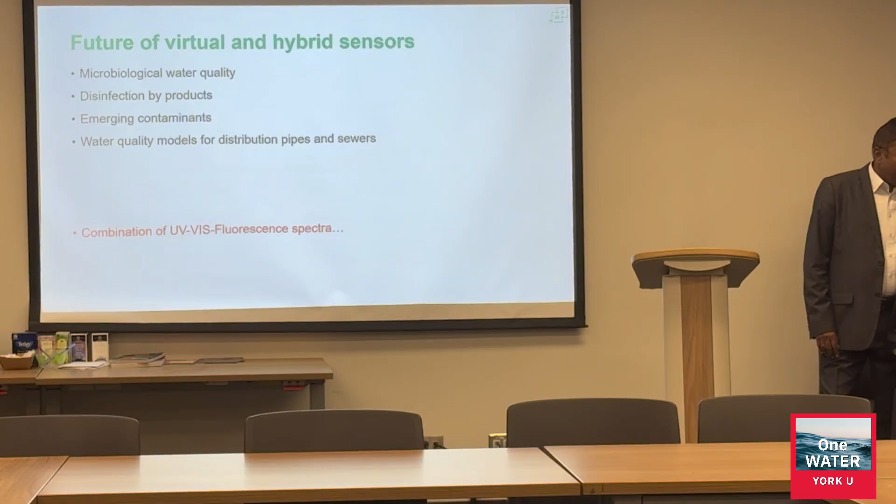You have covered a lot of water-related issues. I want to go back to the diagram that you had at the beginning, with the water treatment plant and wastewater treatment plant. In that diagram, you had an arrow from the wastewater treatment plant going back to the water treatment plant. One of the beginning slides. There we go. Yeah, right here. That big arrow going back to the water treatment, right?

I know in some countries like Israel, which is very water scarce, this is a practice that is acceptable, and in other countries the treated water is widely used for industrial and agricultural use. But in North America, as much as I'm aware, this is not a practice. So what do you think are the issues around recycling water from wastewater to water treatment?

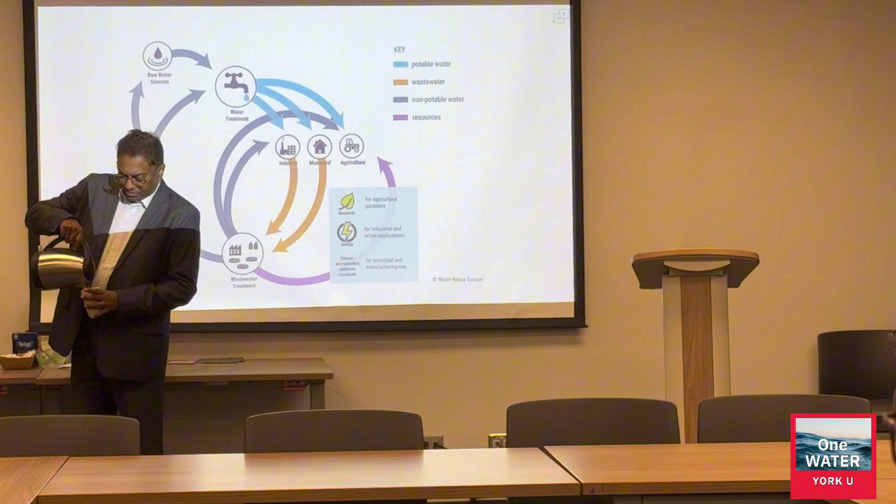Have you been to Singapore, any of you? So there's a fair chance that you drank Singapore's treated wastewater. Yeah, absolutely. But what are the hurdles in North America for it to also be a practice? There are both social and technological ones, right? So in Singapore right now, over 40% of their water supply is coming from wastewater.

The social side is surprising. Some 10-15 years ago when they started, they marketed it as used water. People didn't want to drink it. Why should I drink someone else's wastewater? Exactly. And they paid some money to a big consultant that just changed the name to NEWater, and everyone drinks it now. NEWater is not a problem. It's the same stuff. So it's psychological.

Of course, they still have a problem to deal with, because a good part of Singaporeans are Muslims, and they still feel they can't do this. But Singaporeans are confident that they will solve it, and their target is to increase this percentage up to 65 or so within the next 10 years, so that they will stop their dependency on Malaysia. Reuse of water started in Namibia in the 1950s. That's probably one of the first countries to start it.

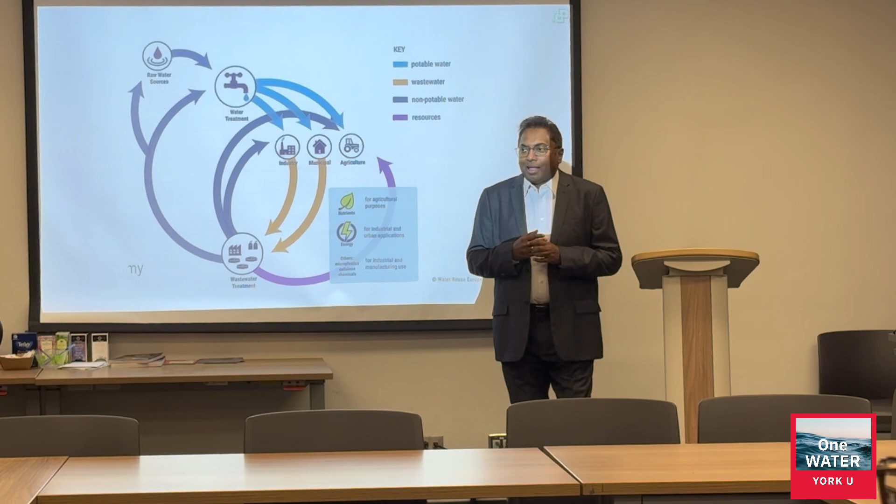And then this one is now from the Norwegian side, the Norwegian cruise line. If we do that in North America, a union is going to kick in and say... Yeah, right. I mean, you mean that?

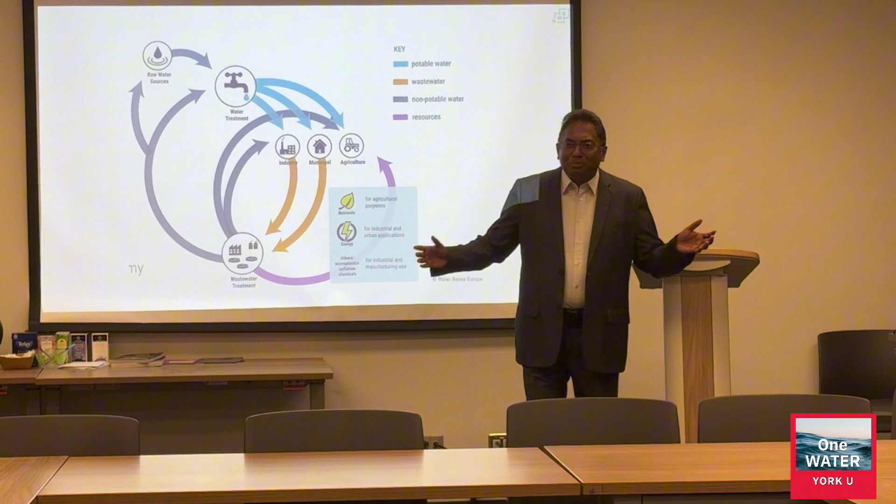Well, this is a problem with all the plant operators as well. When we installed online pH meters, they were protesting: no, this is not going to work, this is not going to work. Why? It works, but that will reveal that they have not calibrated it every Friday. So they don't want to miss their freedom. So this is the underlying way of thinking. So yeah, I mean we should really consider installing these things.

And what I was starting with saying is that we have an Oslo to Kiel in Germany ferry line, 16 hours, and this ferry, it's a nice ferry, like 15 floors, like a floating hotel, right? So there's a big screen showing the water quality of the sea where you're passing. So the people see it, and the ferry line is also happy that, okay, this is what we are doing for the environment. Green ferries. Green ferry.